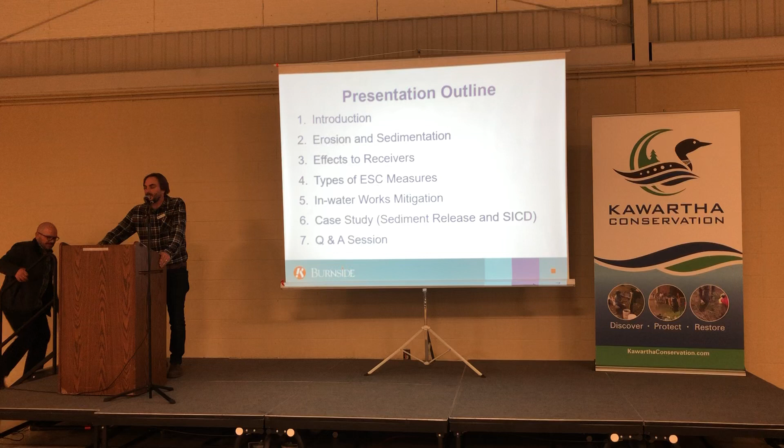Okay. Well, what an opportunity. Really excited to be here today and be able to talk to everybody about a bunch of projects that we work on, we have worked on in the past, related to erosion and sediment control during in-water works. One of them is going to be related to municipal drainage, and it's a bit of an oxymoron when it comes to erosion and sediment control, because we'll get into how that works.

So just the outline here, we're going to go over an introduction. We're going to talk about erosion and sedimentation. We're going to talk about effects to receivers, so water quality, water bodies, water courses, types of ESC measures during in-water work, in-water works mitigation, some of the aspects of how we do our work so we mitigate, such as death of fish, impacts to wildlife. I've got a couple of case studies, a little surprise at the end, and hopefully some questions and answers.

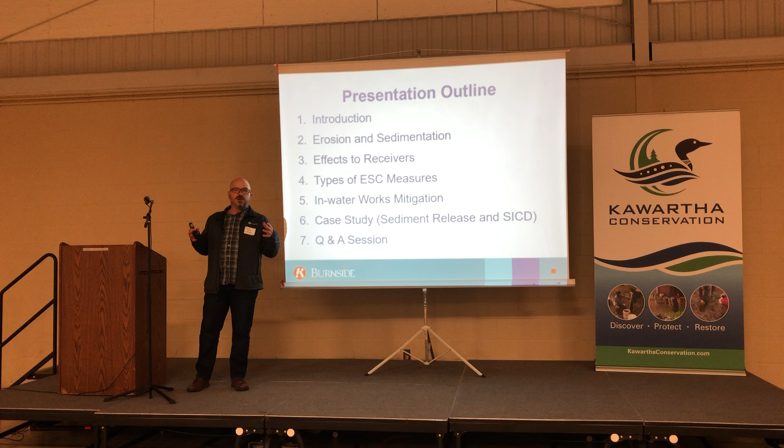I want this to be collaborative. I think this is an opportunity that we can all discuss, and I don't feel like there's any stupid questions, because this is where we learn, right? And that's what it's about.

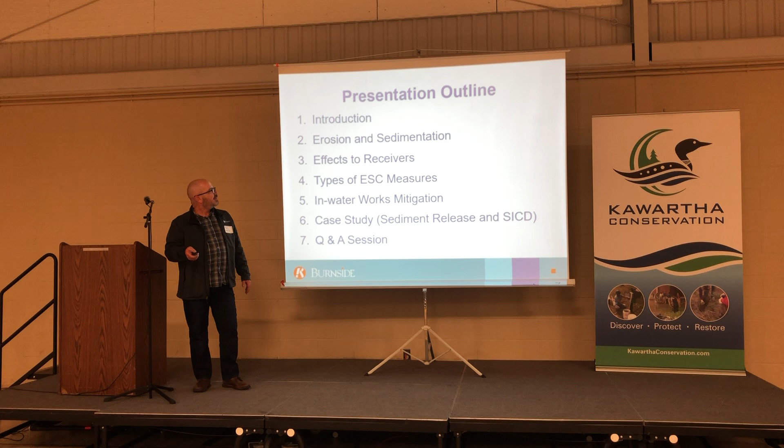So usually this is the hardest part because it's about yourself. And I feel really honored that I'm in this profession because I kind of live it. It is a lifestyle. It's something I was born with. Always wanting to be around water, dealing with fish, dealing with wildlife. Just that need to know and learn, right? It took me into going to Sir Sandford Fleming. I took terrain and water resources technology. Got my diploma, first year geology. I kind of failed. It didn't go well, but I learned a lot from it. So

I'm a senior aquatic ecologist with RJ Burnside Associates. We have about 430 staff, 10 offices in Southern Ontario, basically stopping at Pickering, but Wingham, Woodstock, new office in Hamilton. We've got Collingwood, Guelph, you're gonna miss one, Mississauga, Pickering, Newmarket, Barrie.

I was fortunate to win an award for the innovation and design of the Barefoot Box Culvert through the Ontario Association of Certified Engineering Technicians and Technologists for technical achievement. That was in 2021. And as you can see, I'm a little passionate about fishing too, so there's a little bit of that goes along with what we do.

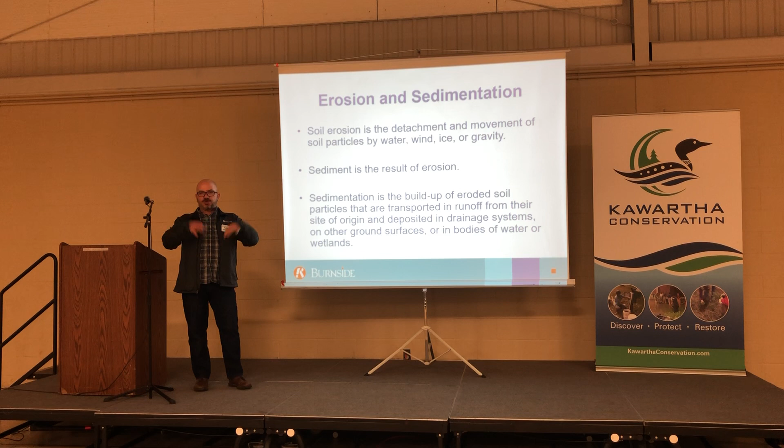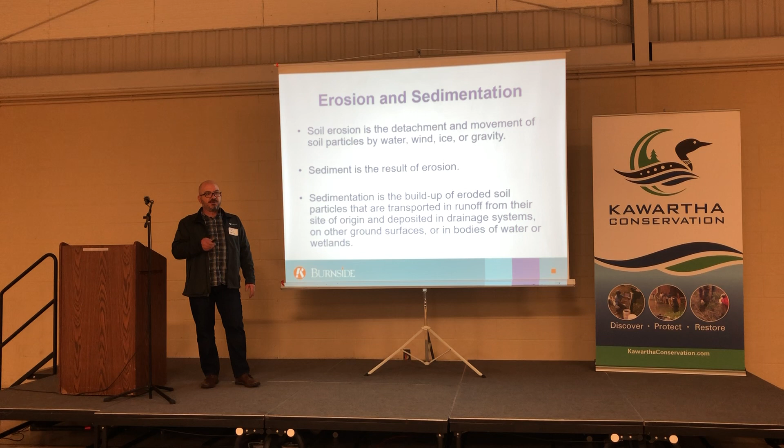And then sedimentation is the buildup of eroded soil particles that are transported in runoff from their site of origin and deposited in drainage systems, other ground surfaces, and bodies of water, water courses, that sort of thing, and wetlands, which is a big deal. If you've ever had to deal with a sediment spill in a wetland, you'll never want it to happen again, because it's literally impossible to deal with.

So I figured I might not even have to talk about this either, but obviously it's something that we can talk about because it's still new. What is erosion and sedimentation? So precipitation, gravity, wind, hitting a ground surface that has loose soils, creating detachment. So detachment of the soil particles, gravity transporting it, and into deposition, which would be sedimentation.

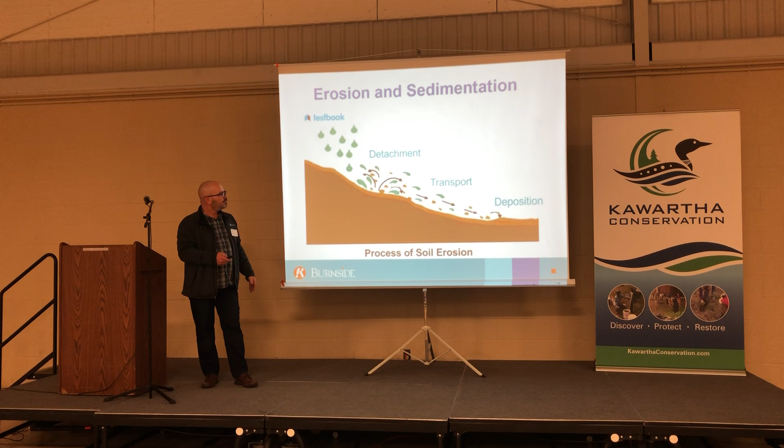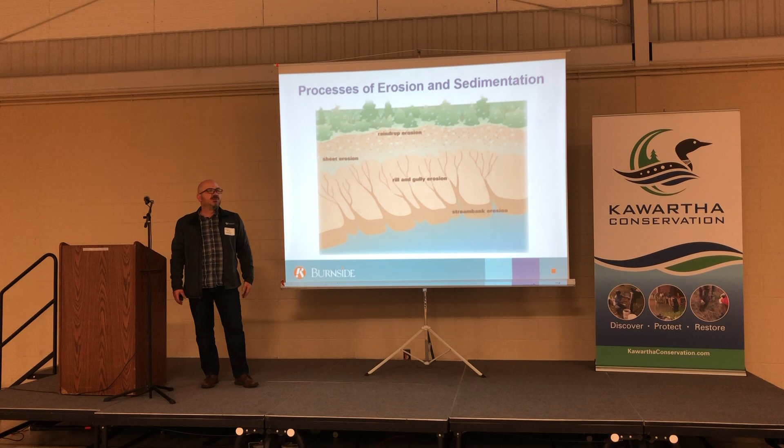And a bit of an overview of kind of a landscape type system where there's stream bank erosion, and what we're seeing in the upgradient areas, up on the slopes, we've got raindrop hitting exposed soils, not vegetated, sheet erosion coming down, and then creating these rills and gullies. Rills and gullies are transporting that soil that's been eroded into streams. It has to get to the water course, it is going to erode down, and it will impact your banks. Once it gets into the stream, you do have a problem.

So some of the effects of erosion and sedimentation on receivers, obviously it impacts the water courses and wetlands. As we discussed, you've got sediment that's going into those zones. It's getting into the substrate. It's getting into the vegetation, and it basically smothers everything. Your invertebrates, anything that's living on the bottom, that critical habitat for fish is smothered, and that's a big situation.

With regards to the morphology of the channel, it will change. So you have sedimentation, you have erosion, and then you have deposition. Now that impacts the channel itself from a morphology perspective, because now the water has to go somewhere else, and now it creates erosion in another place. So that is equal to loss of land.

And in a drainage situation, loss of land is a big deal, but also, with regards to erosion, it's a major problem to the system. Also, what can happen is flooding. So you have erosion, sedimentation, now you've lost the capacity in your channel, and now that water has nowhere to go, and it creates flooding.

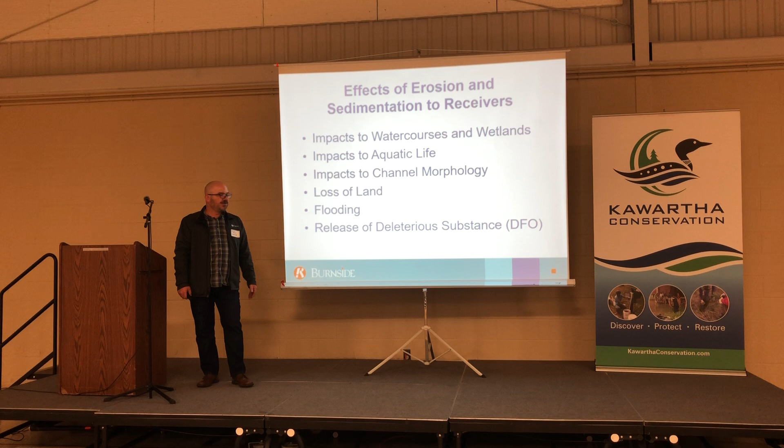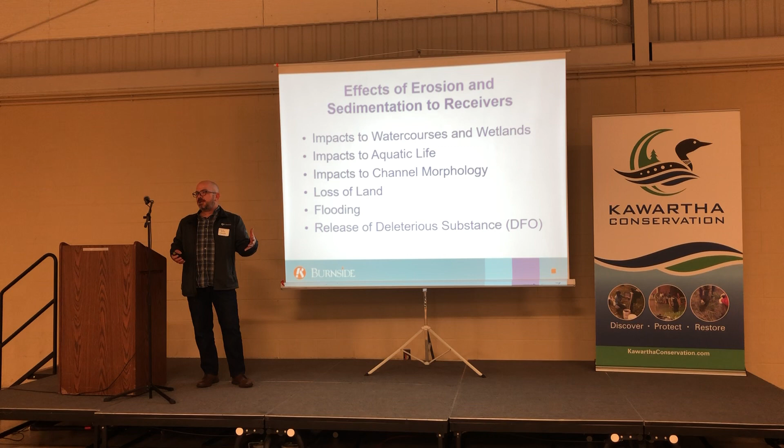With regards to release of sediment, it's called release of a deleterious substance. That's an infraction under the Fisheries Act, and that's an offence. So we don't want to have those things happen. I come from a consulting background, having the opportunity to work on a lot of different projects. So I get to work with contractors, regulators, and engineers. We see a lot of different things happen, and that's where I hope to share my experience.

So I had to put this in because I thought we'd just start off with a laugh. This is for real. This is what actually happens. And I'm sure we've said, the rains are coming. And the contractors said, yeah, we're good. But are we good? We're not good. This is not good. And in this situation, it doesn't matter how many miles of silt fence you put, how much coir matting, how many straw bales, how many T-bars. It doesn't matter because you haven't dealt with your problem.

What do you think the problem is? What's the problem here? All right. Management of water. Right. Exactly. So they didn't have a sediment basin. They did not have a place for their water to go, and when it runs off, it's got to go down gradient and it's going to go to your receiver. So you have to be able to control that water, at least hold it back, and sediment basins are an aspect of land development that's required. So they didn't have it in place, and obviously it didn't work.

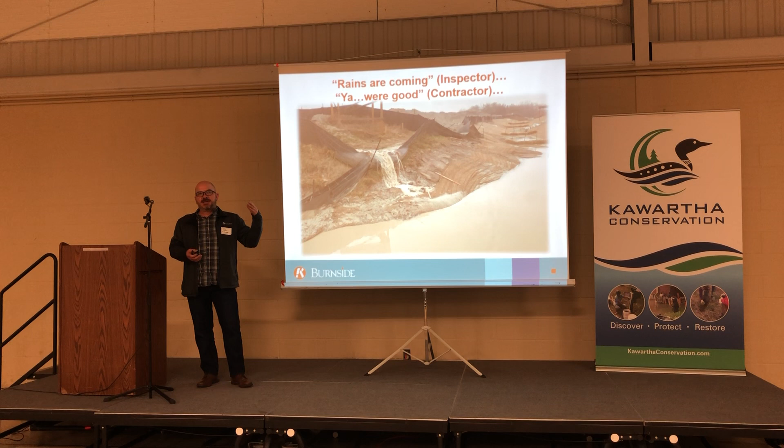So, types of ESC measures, just really ground up, we've talked about silt fences. So there's OPSDs for heavy duty, light duty. What I can say about silt fences, excellent product. I don't know if I like the mesh on the back of these light duty ones. It's not great for wildlife. They easily trap salamanders, frogs, snakes, turtles. They will try to get up this stuff because we've created a barrier. They want to go to the places that they're used to going to, and then they get along that silt fence and then they try to get up it.

So, the heavy duty filter fabric I think is really good, using T-bars, and also ensuring that it's properly installed. You can have miles of this stuff, but if it has one hole this big in the wrong spot, it doesn't matter how many miles of that you have because it's going into the watercourse. We talked about fiber rolls, so these are checks, silt socks, those sorts of things used in channels or runoff areas, and also along banks where you don't want soil to migrate out of where you're doing the work.

Erosion control mats. You can see in this photo here, this is a small creek realignment. We took a pond offline just this last fall. We've got a lot of rock in the area, and we were really under the gun. It was late season. We had to get a late work window, begged for a little bit more time because the ultimate effect would have been a blowout of this pond and a major release of sediment into the Nine Mile, which is a very sensitive system.

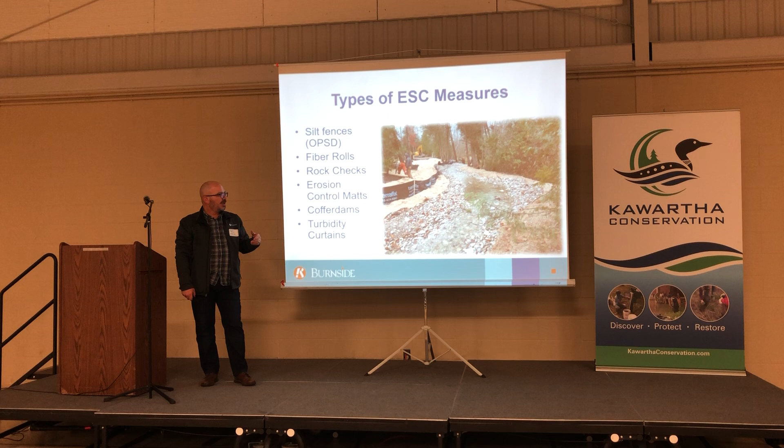When you're applying erosion sediment control, think about layering. Like think about how shingles lay on a roof. You're starting from the bottom and you're working your way up, right? Because when the water comes off, it will shed, not take stuff away from it, or undermine. Cofferdams we'll talk about in in-water works type situations. I've got a couple of those, and turbidity curtains, which definitely helped us out on a project we're going to discuss.

So this is a drainage type project. I think it's a bit of an oxymoron that we talk about ESC and drainage, because in drainage they aren't required to bypass water. They're allowed to just dig in the channel. And when you dig in the channel, what do you think is going to happen? You're going to have a lot of sediment. The reason you're digging is probably to maintain that drain, because it doesn't have the capacity anymore, and you're taking out the fine sediments deposited there, and it's creating a mess. So this one's the South Innisfail Creek Drain. This project's 10 kilometers of channel improvement that we're currently doing. This is an outlet of a culvert that I'll talk about in a little bit.

But just see, you've got your stockpile here where the landowner didn't want that topsoil yet, so we've got heavy-duty silt fence, T-bars, stone protection along the bends and along the base and the toe of the slope, which we'll talk about.

Really, at the end of the day, drainage, when it comes to landowners paying for something, they really struggle with the fact that you're putting something back into that drain. Like, they're paying you to take it out in their mind, right? But our concept and our thoughts are that let's develop drainage that is self-cleansing and stable, because if you just dig a trapezoidal channel and hope that it stays, and we get all these climate-related effects, then we're going to have problems. It is going to erode.

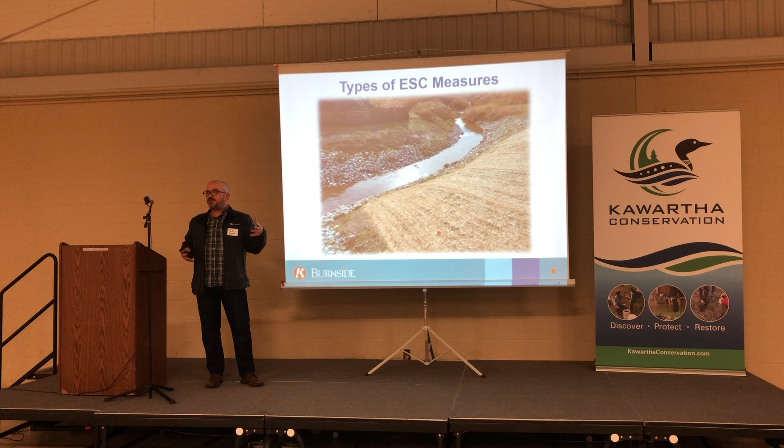So we're now getting people on track, and really, if it's written in the report, you can apply different techniques. So we're going to talk about some innovative techniques that relate to drainage. Some coir matting there.

So in-water works mitigation with regards to drainage. If we're not pumping the water around, and we have to deal with sediment, and we can't use—I've heard people talk about silt fences in the watercourse. It's like, what? We can't put a turbidity curtain across the flow. We got to figure out a way that we're going to deal with the sediment that's laden in the water, because they still have to dig.

So I really believe sediment traps, which we've termed pool riffles—which is opposite of what you would think, because it's usually riffle pool—is a means of being able to capture sediment and create an area that during maintenance is also used to remove the sediment.

Staging the work from upstream to downstream. A lot of contractors want to work from downstream to upstream. But if you're working from downstream to upstream in flowing water, what's going to happen with sediment? It just keeps going into the places that you just cleaned, because you're liberating the sediment as you're working up the system. So work upstream to downstream.

Bank protection I talked about, and we'll talk about a few different applications. Big one is sod matting. This is an innovative technique that we're gonna talk and discuss, and I've got a video showing how it works.

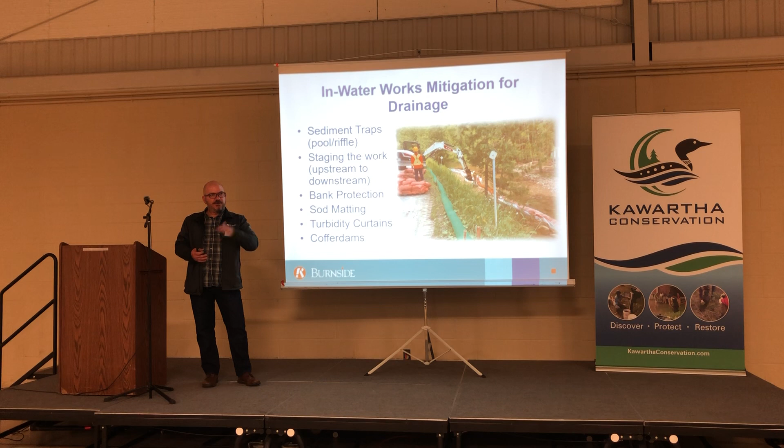Turbidity curtains and obviously cofferdams, which you can see in this being installed—whoops, that's not the right way. Big thing with cofferdams, if you are gonna use them, it has to have poly. You can have as many silt bags or sandbags as you want, but if you don't have the poly there to keep the water out, it's not gonna work. And it has to be on cohesive material at the bottom that doesn't allow the water to come in. If you lay poly on gravel, you're going to keep wondering why water's going to come in—it's because the gravel's conveying the water.

So how is a sediment trap pool riffle designed? It's basically a large pool-type excavation or area within the channel itself that has a riffle crest at the down gradient side with stone that is elevated so it backs up the water.

We like to use types of stone that are diverse in size, not just the same kind of bowling ball, because at the end of the day we always struggled with this when we did natural channel design, and the regulatory agency said, we want clean round stone. Okay, clean round stone, 2 to 6 inch, clean round stone—you're going to develop your riffle out of clean round stone. Okay, we built this nice riffle, we've got the crest, we've got the down gradient, water's going over top, let the flow go. Where'd the water go? There's no water. It's in the voids. So you need to pack the voids in these riffles to actually allow the water to go over top.

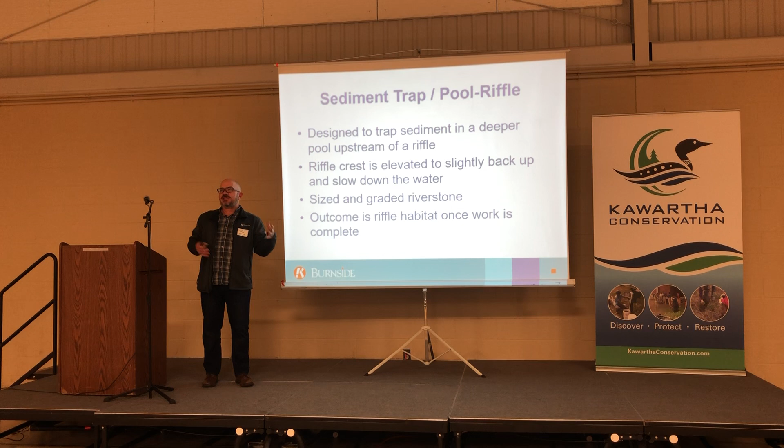So having a diversified stone size and gradient is really important. And then what would be discussed in drainage is let's use riprap. But riprap we can't put below the high water mark. So why not use round stone, and then at the end we grade it. Once we're done, we grade it, and it turns into an actual riffle that the fish can use.

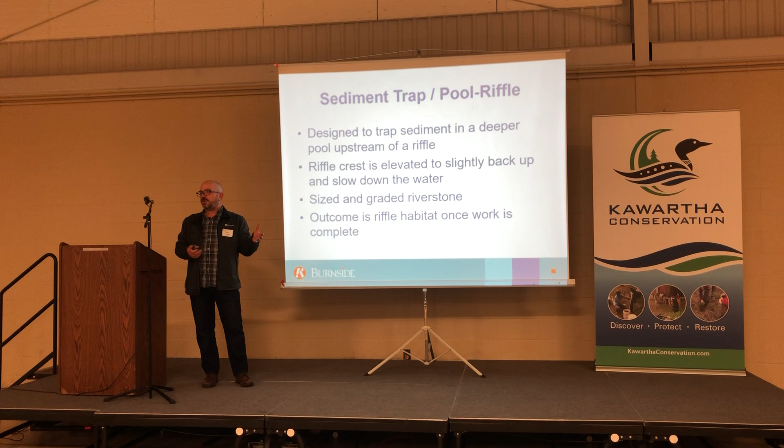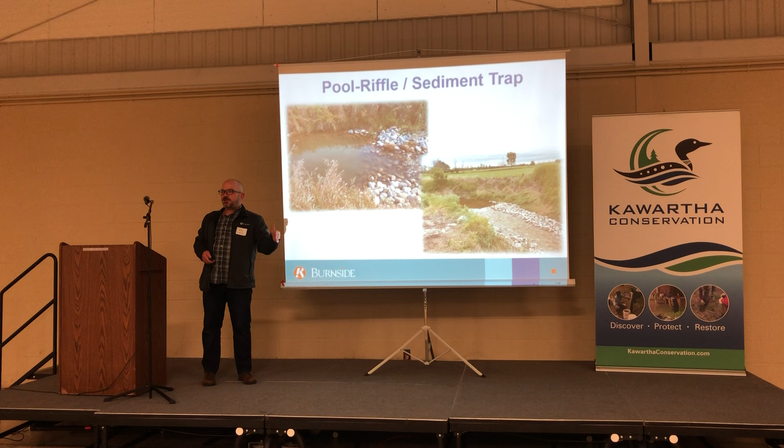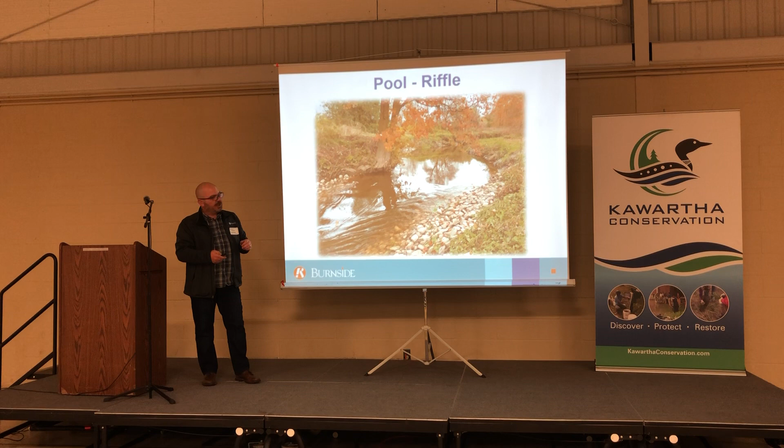So we talked about bank protection with regards to stone. Typically what's required in drainage application, they allow the use of riprap. I'll just throw it out there, I hope I don't offend any engineers or the OPSD, but let's stop putting filter fabric or filter cloth underneath riprap because it doesn't work. That water gets underneath, and if it's anywhere near the water course, these guys are contractors, they know what happens. It gets blown away, it gets pulled away, it tugs on that material, lifts the riprap, and you come back and get paid to fix it.

So you're allowed riprap above the annual high water mark. We can easily vegetate it. We put it into the banks, into the soil, and the natural seeds that are in there will grow up, and once that matrix comes together, it creates a pretty strong upper bank.

Below the high water mark, we're putting in round stone, river stone. In some drainage projects, landowners have this pile of stone they just want off the property because they want to grow corn. You can take that and use it. It's natural, it's there, and I think it's more about understanding the size and making it work with the granular materials you have to get, which I hear is very hard to get.

Down in southwestern Ontario, we're running into problems getting granular material for our streams because it's just not there.

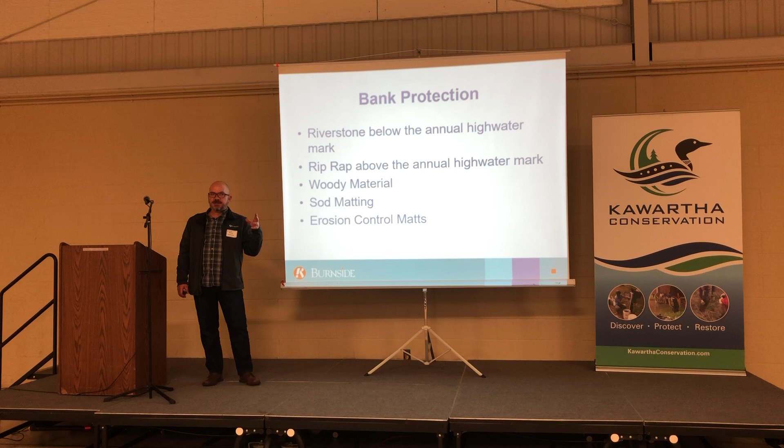We have incorporated woody material into drainage projects because the South Innisfil Creek drain was a DFO authorization. Under that DFO authorization process, you have mitigation monitoring and offsetting. Offsetting is determining or outlining what your gain in habitat or replacement of habitat is going to be, and they gauge that and you have to monitor it. In that situation, we had very steep banks, and we wanted to use woody debris as a means of providing fish habitat. Fish like wood.

Landowners really struggle with the fact that you're putting something like that back in the drain, because they just want it out.

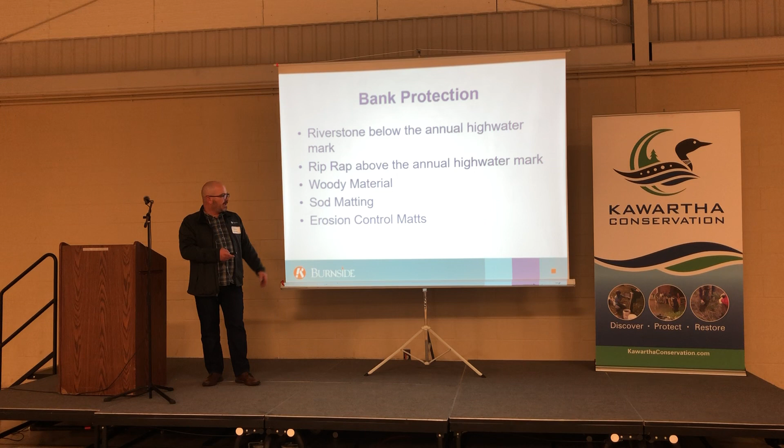We'll talk about erosion control mats, we did already. So, stone protection and woody debris.

We're talking about working in flowing systems. We'll set streams aside for a moment. When you do a stream, a natural water course, you are pumping water around. You have a cofferdam upstream and downstream, you isolate your area, get effectively sized pumps to take the water and convey it around your work area, and discharge it downstream. You could use flumes or a bypass channel, but at the end of the day, you're not working in the stream without isolating it.

In drainage, you're allowed to work as the stream is flowing. So one of the things we want to do is work at the front, on the toe of the slope or at the bank, to create that barrier so you can work behind it. Get that stone in. We're using keystones, with a bit of smaller woody debris intermixed.

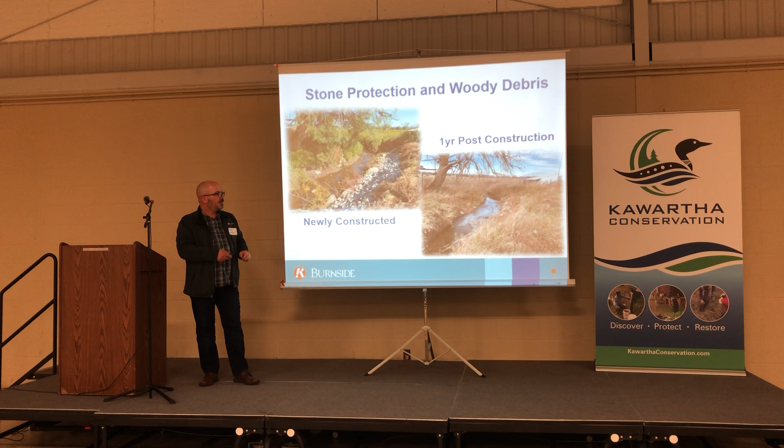I think he puts round stone or some riprap on the overbank, and then used sod matting on top. This is right after construction, and then that's one year later. It's been vegetated, and it's stable.

Here's another application with regards to stone protection at the toe of the bank. This system was very sandy, it wanted to move around. We want to ensure we're not having a release of sediment into the system, so you've got to look at your areas that are eroding and protect it.

So we used local woody debris, willow type material. We'll see if it grows. At the end of the day, it's something that's protecting the toe slope within the bank, or the toe of the bank.

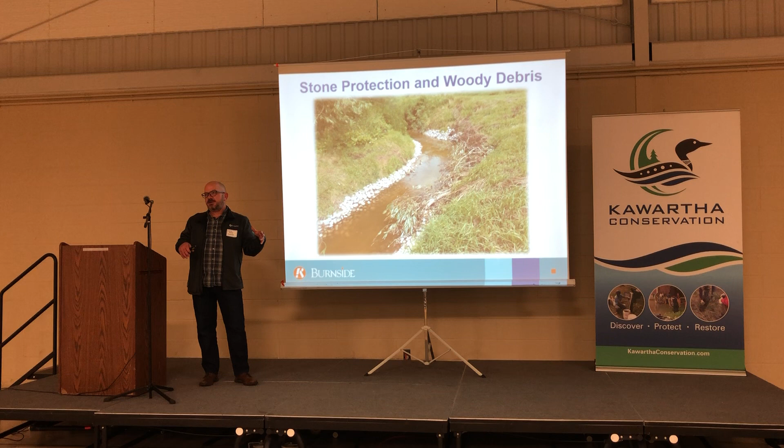Incorporating meanders isn't typical in drainage, they just want to see a linear trapezoidal channel. The issue with this project was massive flooding. They had downstream high quality market gardens producing baby food quality carrots, onions, potatoes. If their crops flood for longer than 48 hours, it's done, and you can imagine the kind of cost that goes into something like that. These are low-lying areas, similar to the Holland Marsh.

We put these meanders in because it allows for the sediment to find its way. There needs to be natural migration of sediment because that's never going to end. Even when you dig down into some of these areas, there's saturated sands that will continue leaching into your system. You haven't stopped that sand from moving because it's saturated, it wants to come in. So the thought is having these meanders, having diversity, allowing for fish habitat, and then also allowing for deposition and natural processes to happen. This stone, this is right after it was built.

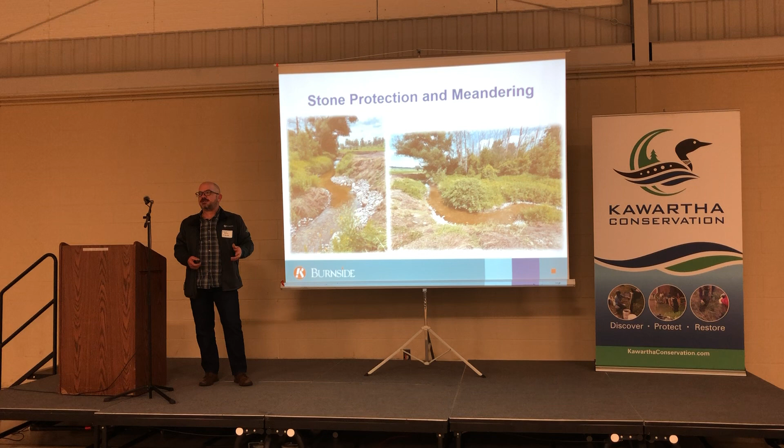That was built in one day, and this was just this last season. When we go back, we'll see shoots of grass coming up through it. We'll see fine sediments getting into the voids, that sort of naturalization.

So sod matting I've talked about, and we're going to get into it here. It's something I experienced probably 12 to 15 years ago.

I will give all the credit to R&M Construction. They're a Dutch company, and they reuse everything. They will make chips out of trees. They always think about how to reuse what they have. They will take a shrub and plant it there. They won't be going away with anything, they won't be trucking anything off site.

And what we got into was a very confined channel where we had to protect the banks. And they said, well, really at the end of the day, if we have to establish a root mass that is going to be capable of handling high flows, how long does it take to do that? Like, you have to have a serious root mass so that you don't lose your soils. So this sod matting actually is a means of using the excavator with available material.

It was kind of hard in Innisfil because we had a lot of sandy, fine-type condition, which would just break apart. But the areas we could use it, good topsoil, 30 centimeters thick, 1 to 2 meters in length, basically putting it along the tops of the banks and letting it fall over onto the rock toe slope, then pushing it in. It's bucket packed, using the excavator and basically pushing it in as we go.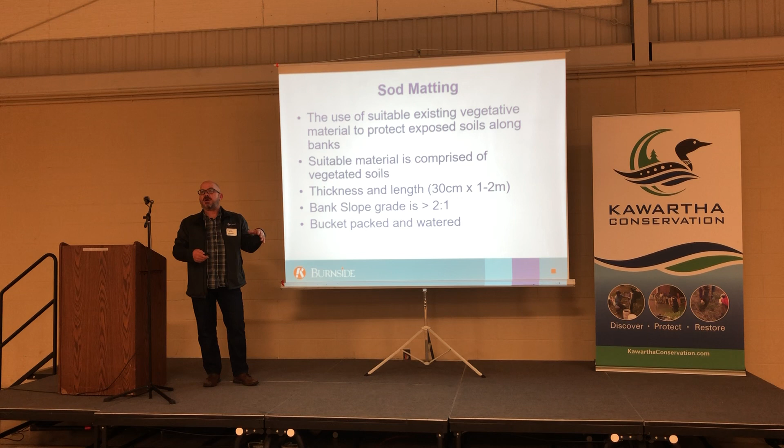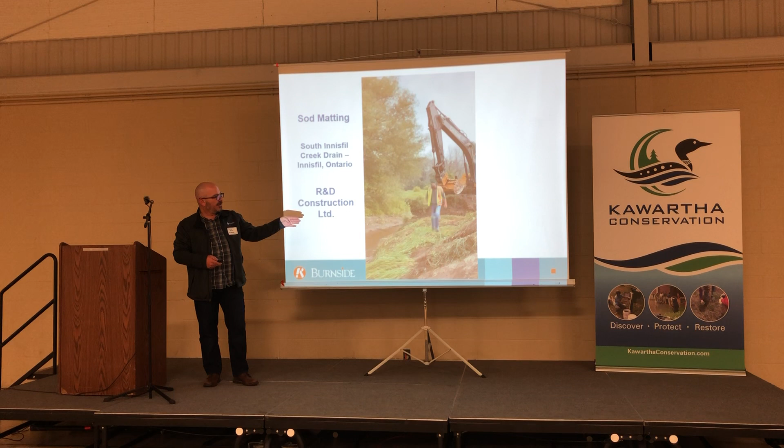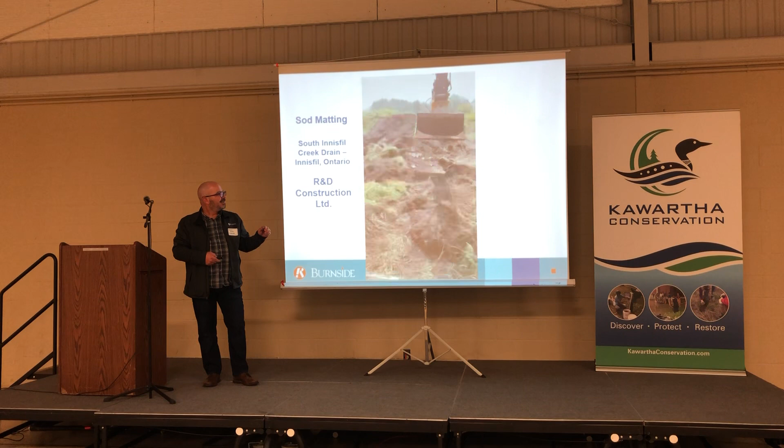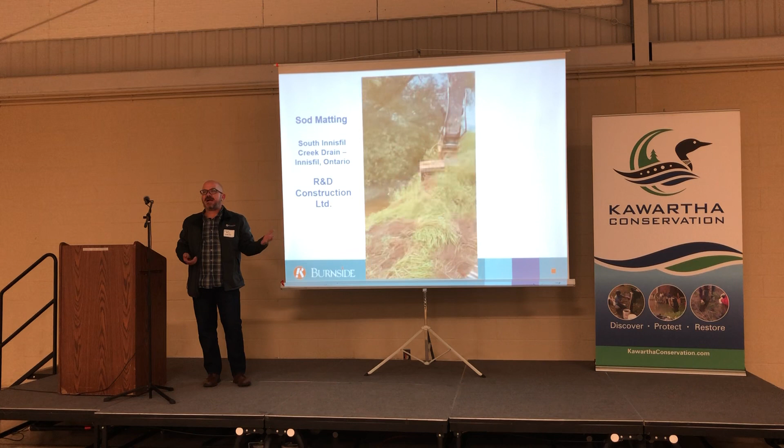So instead of me keep going on about explaining it, I want to show you a video. This is a time lapse from R&D construction. We've got a terraced type channel right now, so we've got a terrace in the low flow overhang. We're using existing sod material, so he's excavating, and as he's saving that sod mat off to the side, then he's placing it from the bottom of the bank and up. If you've never been in an excavator before, you're going to get an experience right now, this is what it's like for him in really fast mode. But as you can see, in an area that we already have vegetation, we're not taking this stuff off site, we're going to use it.

So turbidity curtains, we're going to talk about how we mitigate during in-water works. We've had a lot of talk about turbidity curtains. I think excellent product, but in the streams and water courses I've worked in, it's pretty hard to put them across the current. It's just going to get mowed down, you're going to see the water back up, it's going to want to go over top. So I feel like turbidity curtains are very useful on banks, like when we're doing bank work where we can isolate the area and be able to tie it off, but still allow the flow to keep going. We never want to battle Mother Nature because it won't work, you just don't win.

So another thing I want to talk about is how we deploy those turbidity curtains, because we're dealing with fish and wildlife. When we're in the water, if you just take the turbidity curtain and bring it out and around on the bank, guess what you're doing? You're trapping everything that lives there, and in our systems there's a lot. Every time a contractor sees what we have in our buckets after we've salvaged the entire section, it blows their minds. They're like, there's nothing? Come look in the bucket. They're like, are you kidding me? I said, yeah, there's that. And then when you de-water or anything like that, there'll be twice that, that's how much is there.

So the thought about deploying these turbidity curtains is from the shoreline out. Get it up along the shoreline and then inch it out from upstream to downstream using T-bars and get it into place, because that will actually exclude fish from your area. You're still going to have to salvage, but you haven't trapped them.

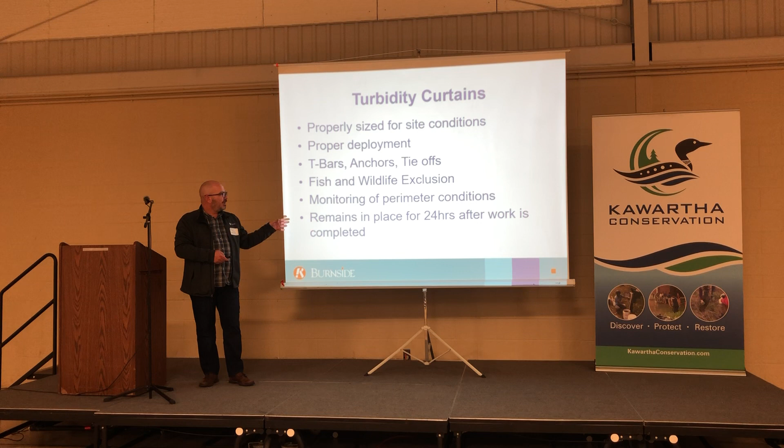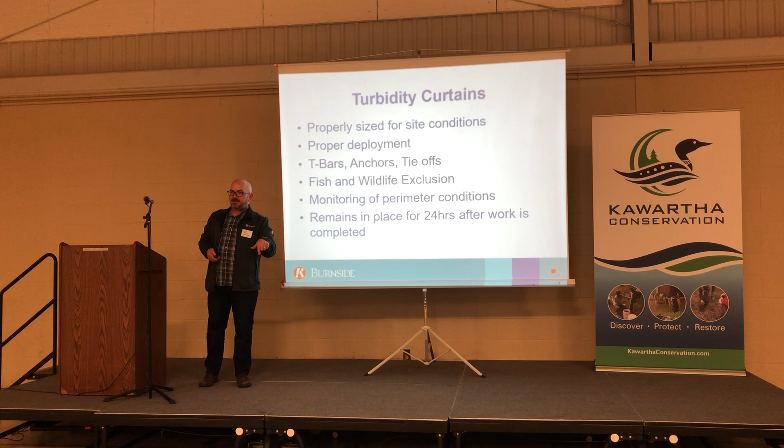On one project, there was no release of sediment allowed. Couldn't have any release of sediment. So the other question people ask is, well, when can we take it out? DFO's preference is 24 hours. But really, what it boils down to is that the water quality is the same inside the curtain as it is outside. If it's still dirty in there and it's been 24 hours, well, guess what? You're going to have to wait.

You should wait. This is a project on the Nottawasaga River. I was watching Chinook salmon come up in August. So that timing window, they say, is the end of September. Well, on the Nottawasaga River, it's beginning, they come in as early as mid-July and into August. Fresh fish from Georgian Bay up 60 miles of river.

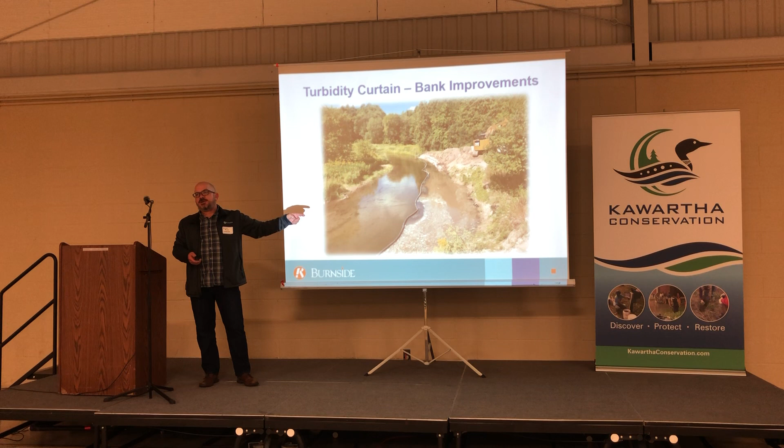So this is a bank stabilization project with R&D, and effective use of the turbidity curtain. They have a few lines anchored off to the outside to keep it from getting bowed in. So I think you have to work with your site conditions. The river's going to tell you what you're going to need to do. This is basically a vegetated rock embankment all the way down. I'm standing on a bridge where the abutments and footings were getting undermined, so we had to reestablish that.

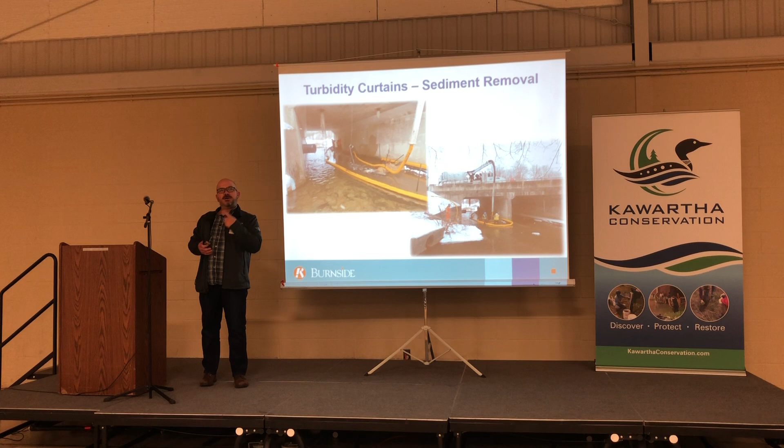I'm going to highlight a sediment removal project at the end, but here's a recent project from last March where we are in the water using turbidity curtains to isolate sediment that has been released. We're using a vac truck off the bridge to suck the sediment out. For anybody who's ever going to have to deal with something like this, just be aware that a vac truck isn't the solution, because it needs air to actually move the material. It can't just go right into the water because it has no air to keep the material moving.

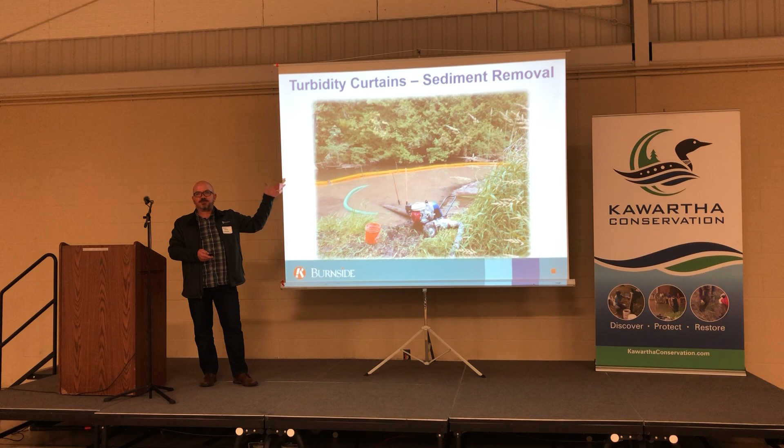Pretty dirty. This was another one. That was a sludge pump. We'll talk about that one later, but I think just the aspect of that is a high quality trout stream. There's brown trout, brook trout in there.

We had to deal with the sediment. So, with regards to mitigation, we also have to deal with fish and wildlife, and being effective in how we deal with them. You know, I can tell you the contractors don't want to hear that you're going to be salvaging fish for the next two days. You need to get in, get it done. You have to have a license to collect. You have to have good equipment, and you have to schedule it at the right time. If you get a 24-hour rain event or whatever before, and you think you're going to go in there with all your equipment and show up at site, even if they want you to get it done, it's probably not going to happen.

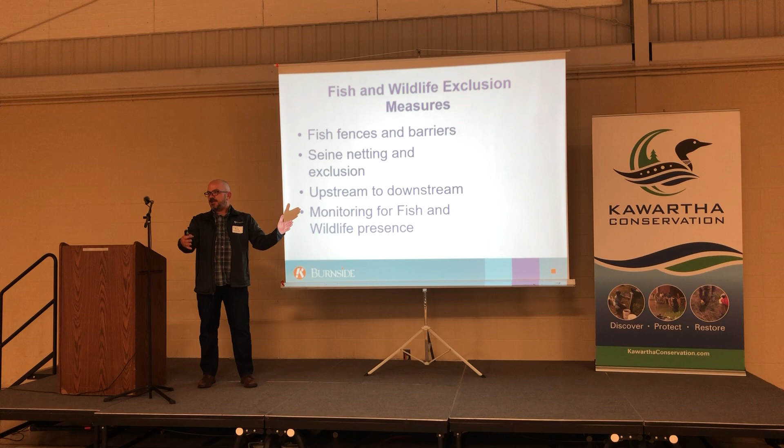So in the drainage world, we were able to use fish fences and barriers as a means to exclude fish from the work area. That was permitted under the authorization. How we did that was we put a barrier upstream, we would seine net down through, exclude fish in the area, and then put the other fish fence down below that, using 1/8-inch metal wire mesh, T-bars, that sort of thing.

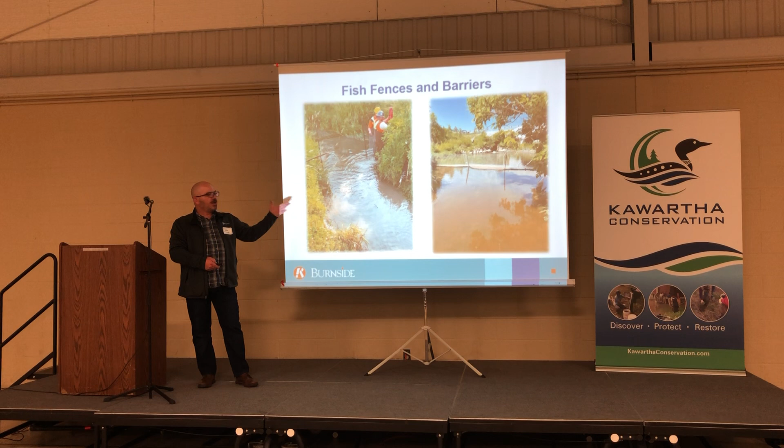So here's a couple photos of how that's happening. T-bars to keep it upright. We're not in a high gradient system, right? So it's not too bad.

There's the seine netting. Our electrofishing crew working at salvaging fish. And I'll be honest, just because you have a backpack on, you're not getting them all. When you de-water, like even at culvert situations, we'll de-water. Even if you electrofish, you're probably going to miss 30 to 40%. But when you de-water and you seine net, or use dip nets, once you de-water right to the bottom, you will get them all.

But you have to have a fish screen on your intakes, and that's not just that muffler-looking thing at the bottom. That is a full-blown, suitably sized DFO fish screen guideline approved intake, because the velocity coming in there is harmful to fish.

So I want to throw this in, we get to work in the summer because that's the best time. I don't know, but you get those freak events, and you can build a cofferdam, but don't expect to hold back the water when you get that big event. You're probably just going to have to repair and get it figured out. I think if anything, don't build it so high that you're going to create a major problem.

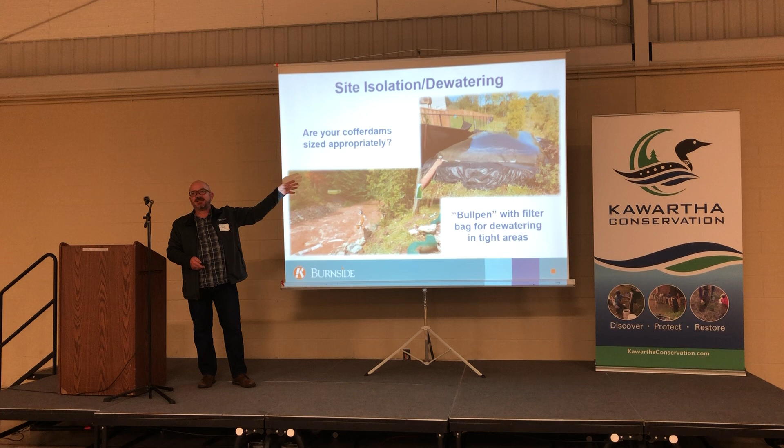That is basically a filter bag that doesn't just work on its own. You need to have a filter cloth and a staked hay bale perimeter that can look really good.

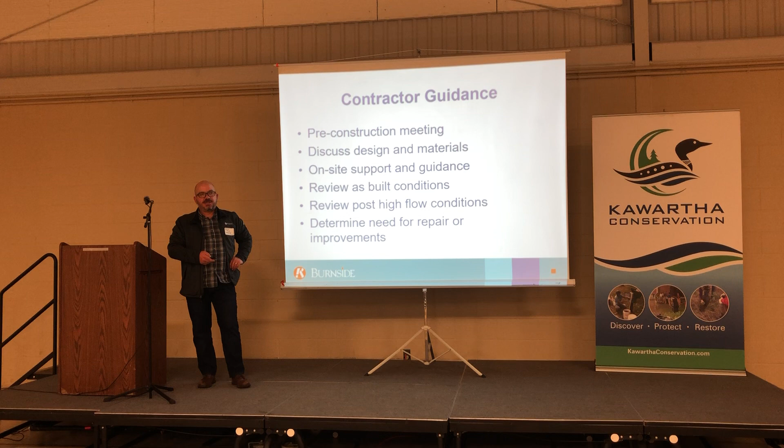I think this is self-explanatory. You need to work with the contractor, talk about what's going on, understand the contract, and work together to get it done. I think that's the message.

So this is the case study, this one was just last year. It was dealing with 3,600 cubic meters of sediment into a high-quality trout stream.

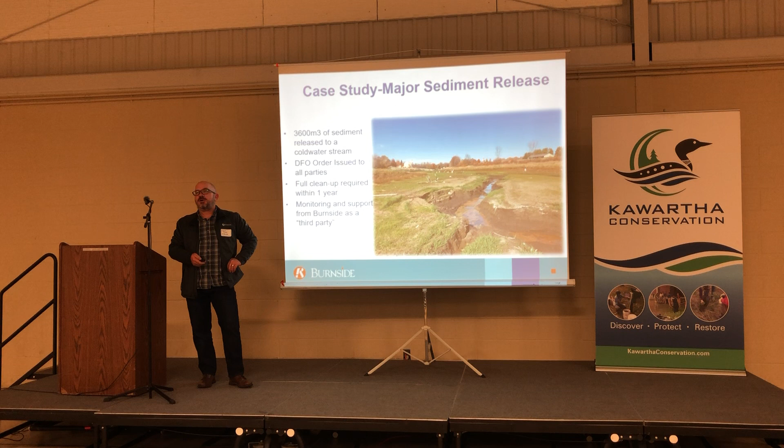It had brown trout in it, spawning activity. DFO issued orders to all parties, requiring full cleanup within one year. We got brought in as a third party to deal with the mess.

Here, whoa, just a second. This is the mess - that's usually a 6-foot deep hole. This is some of the cleanup.

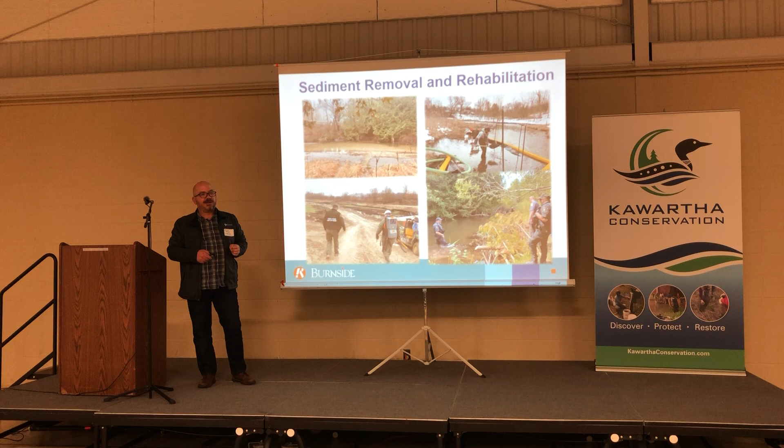And these two guys are your worst nightmare, because they are the officers questioning everything you're doing. They want to know that you're doing a good job. Let's just say I felt like a bit of a punching bag, but I guess that was my fault.

We had an 80-year-old pond. We were able to get things back on track, working with the contractor.

This is the stream upstream, a year old now, and we have trout living in it. DFO walked up through the entire thing and spooked trout all over. We were able to use large woody debris. At the end of the day, let's make it like a stream, okay?

There's lots of OPSDs out there, but think about it - you need to think about what the fish want.

240 cubic meters was the largest sediment area we had to deal with. We used stabilization in place, using woody debris to stabilize that sediment because there was no way to get it out.

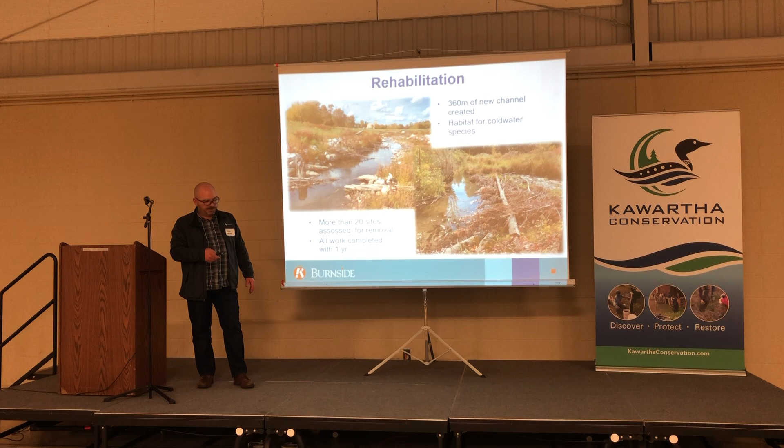Yeah, it was over 20 sites that we had to deal with. South Innisfil Creek Drain - I think I talked quite a bit about it, so I'm not going to get into it too much.

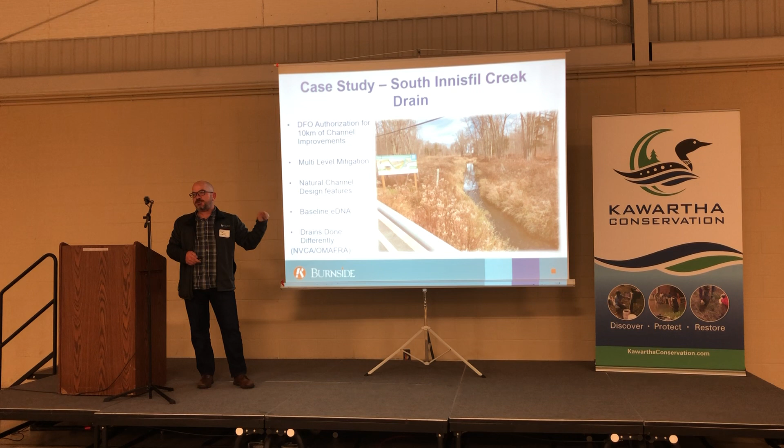10 kilometers. We've done an eDNA sampling program, a baseline study before we did all the work, and we're hoping to compare that in the future to improvement of sensitive species. Let's see if we've done a good job.

I'd like an opportunity to talk about the barefoot box culvert. I don't get a chance because we haven't been out due to COVID for a long time, and now we get to talk to people. This is a little bit of my baby.

It is a perforated precast box culvert that allows groundwater upwelling to happen in the base of the culvert. The groundwater upwelling supports fish habitat, critical habitat for brook trout. They need groundwater to spawn, and they will not spawn anywhere unless groundwater is there.

Oh, just a second. Who knows what this is? It's hard to see - WC.

What does groundwater love? What plant loves groundwater? Right, this is a barefoot box culvert. Here's watercress.

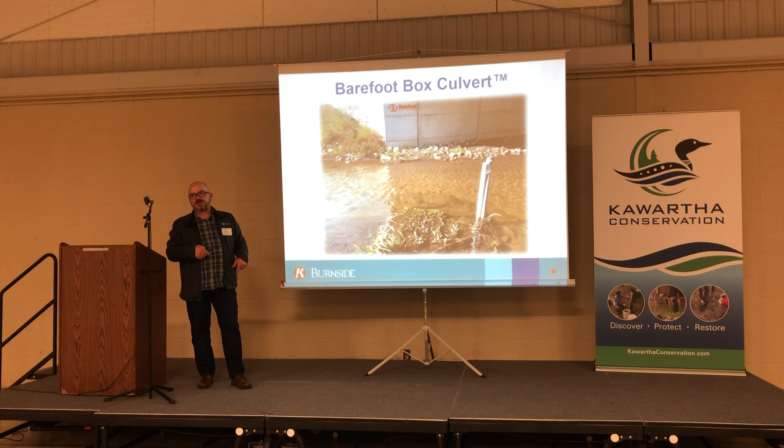So here's a little video, and it's about the performance of the barefoot box culvert. Hopefully the sound makes sense.

Can't sing. Not great.

You want sound? Yep, we got it. You got sound? I can hear. All right, we got sound.

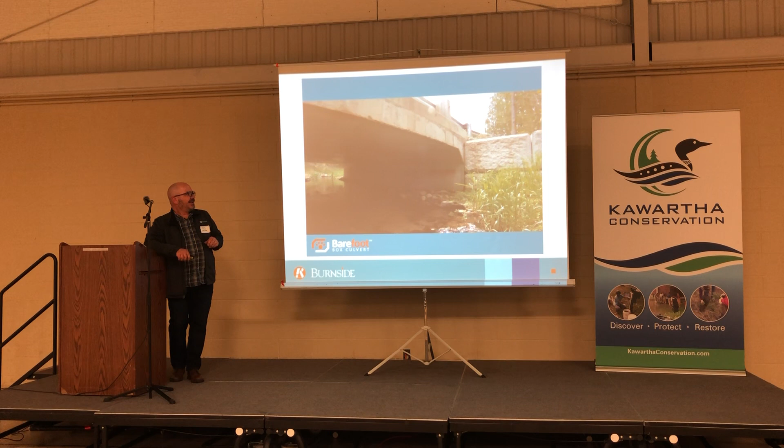So this is in Melanchthon. It was the first one ever installed, in 2015. Good success.

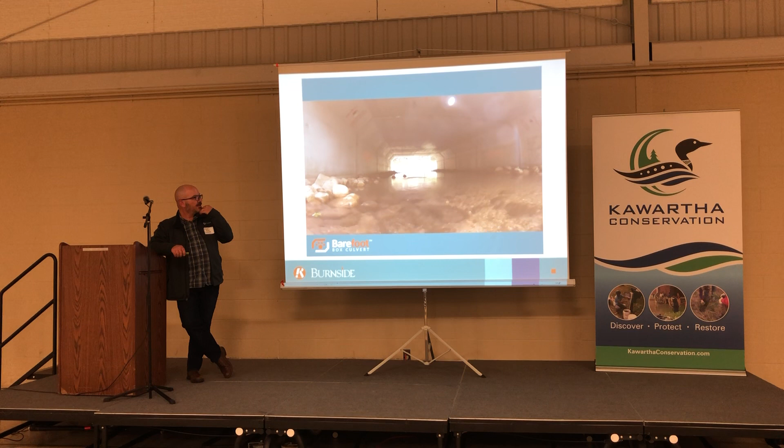These are brook trout coming out of the culvert. And these aren't little guys, these are decent fish.

Any kind of spawning that happens, the males are typically territorial. Keep an eye on the right-hand side of the screen - this is a smaller male trying to find a zone.

And you will see a little bit of predation happening - predatory instinct, which is kind of neat.

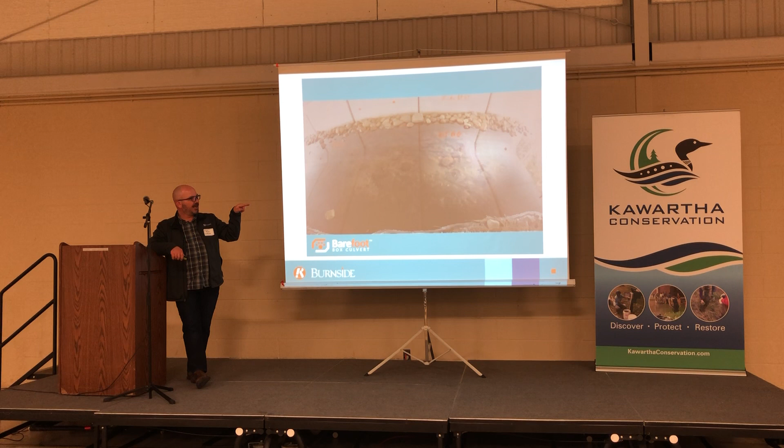This is using a GoPro, so you come in and chase, put a GoPro inside the culvert. I also saw some activity, so I put one under the water.

This is time lapse. I was sitting at the table with my daughter while she was eating a bowl of, let's say, Fruit Loops. When I saw this, I put my hands up and said, 'This is awesome.' She said, 'Can I have another bowl of Fruit Loops?' And I said, 'Yeah, no problem.'

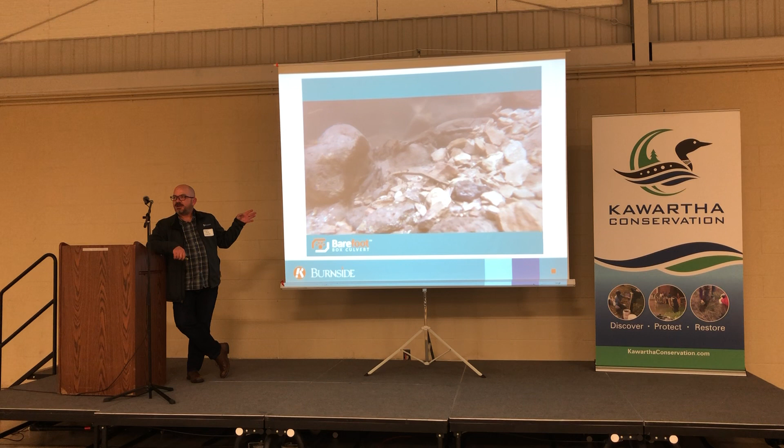It's great to have spawning, but you need to have Young of the Year. If you have Young of the Year, then you know something has worked, and you need Young of the Year inside the Barefoot box culvert. That's recruitment to the system.

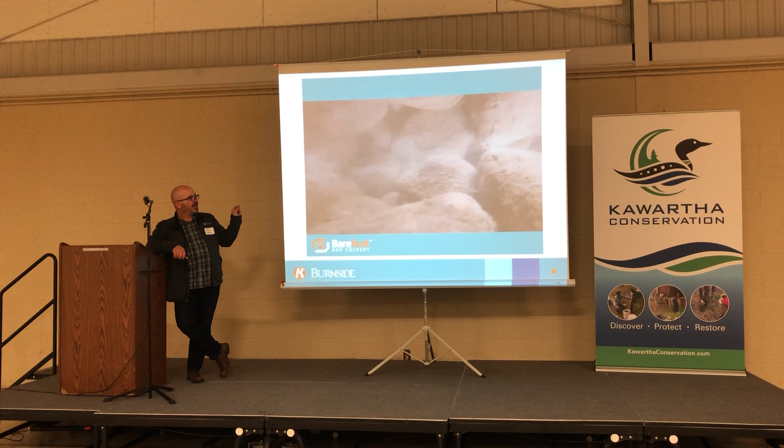So when people say, 'Does it work?' I just have to show this. Thank you.